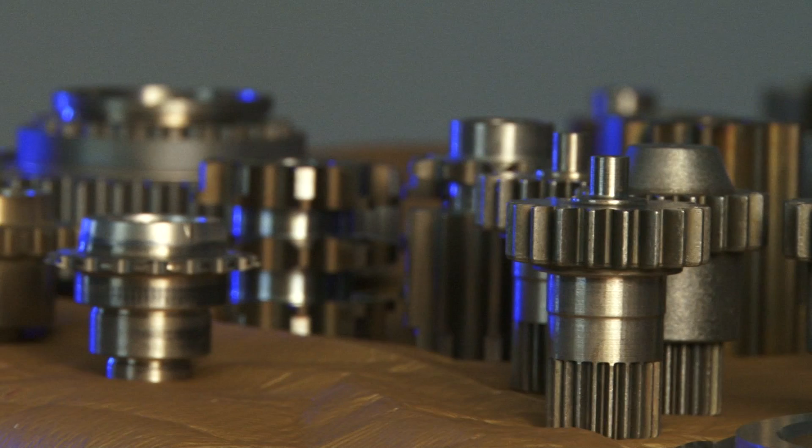Powdered metallurgy has long been the process of choice for the manufacture of net-shaped metal components. PM is extremely effective in creating net-shaped configuration and details that align with the direction of the press. For a long time, powdered metal components, although superior in so many ways, were limited by the difficulties associated with creating net-shaped elements in directions other than that of the press.

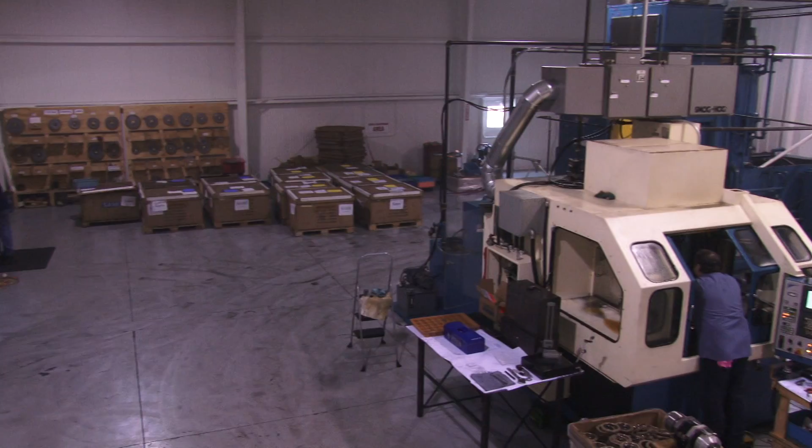Because of the geometric complexity that comes from the net shaping process, methods such as single-point machining and grinding proved unreliable, inefficient, and would often destroy the net shape cost advantage of PM. That is, until now. SAMI, Super Abrasive Machining Innovations, brings the stock removal capabilities of grinding with the cost productivity of machining and a reliability profile that is unparalleled in this global industry.

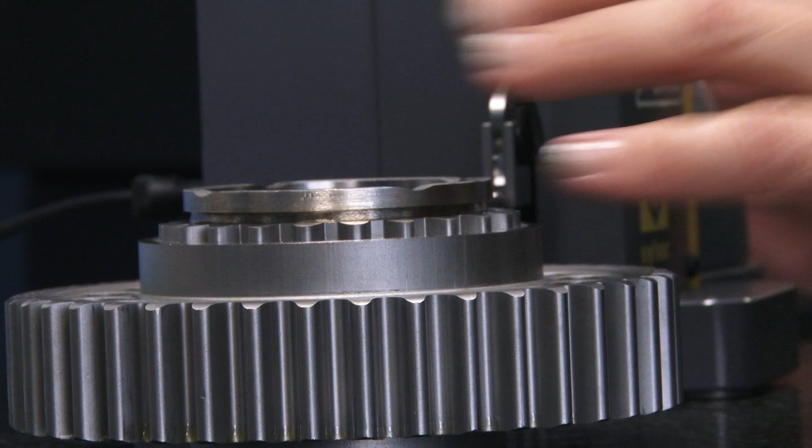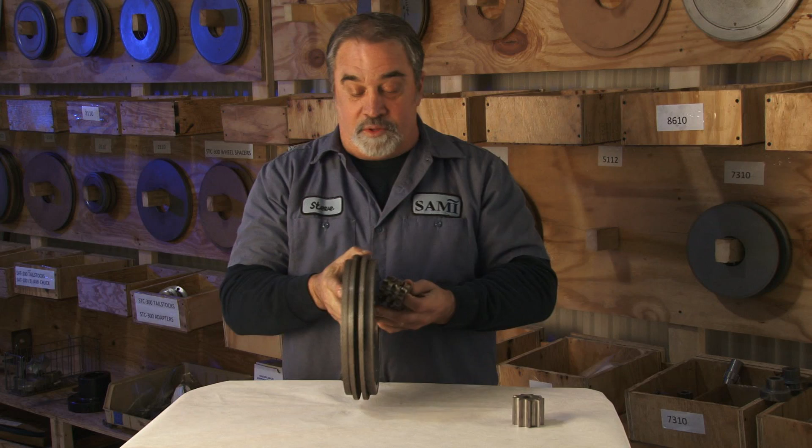In short, super abrasive machining combines the speed and precision of machining with the stock removal capabilities of grinding. This breakthrough was made possible by the development of high-tolerance grinding wheels electroplated with cubic boron nitride, known as CBN, and the use of advanced coolants that allow fast, accurate, heavy stock removal on an extremely cost-effective basis.

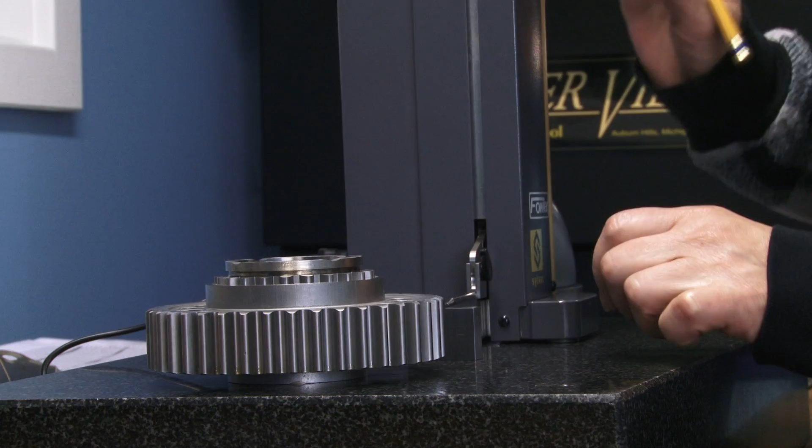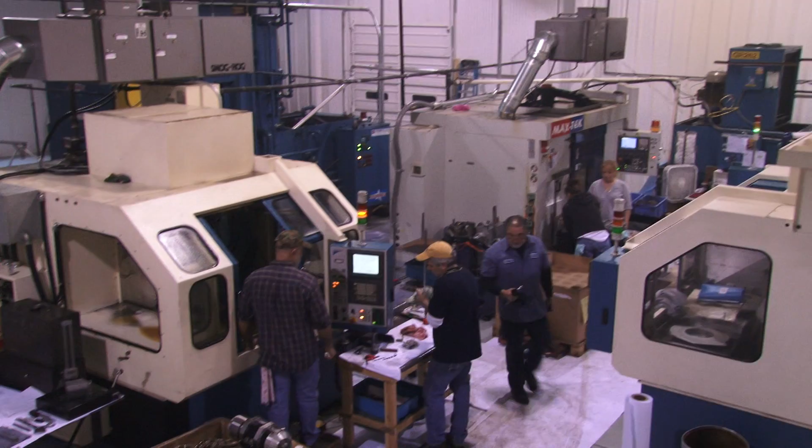Before any order is fulfilled, SAMI performs sample test runs for the Quality Control Department, where highly accurate gauging and measurement equipment and techniques confirm the inherent accuracy and repeatability of the super abrasive process for each and every part. SAMI is an ISO 9001-2008 registered company with a rapidly growing customer base. We're driven by practices and processes accepted worldwide in supplying our product and application services.

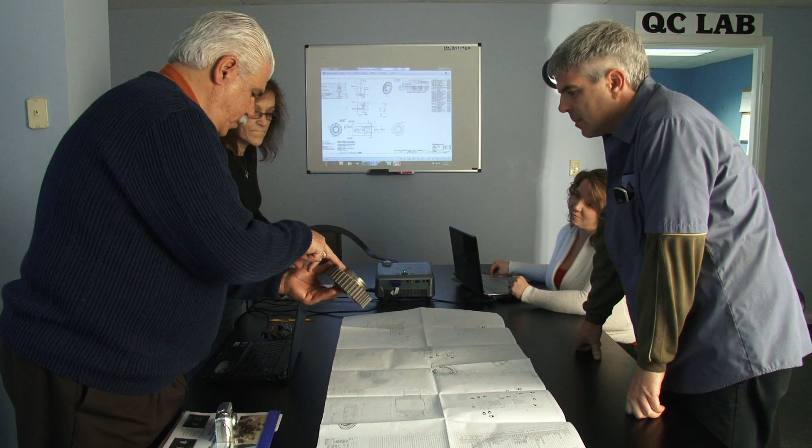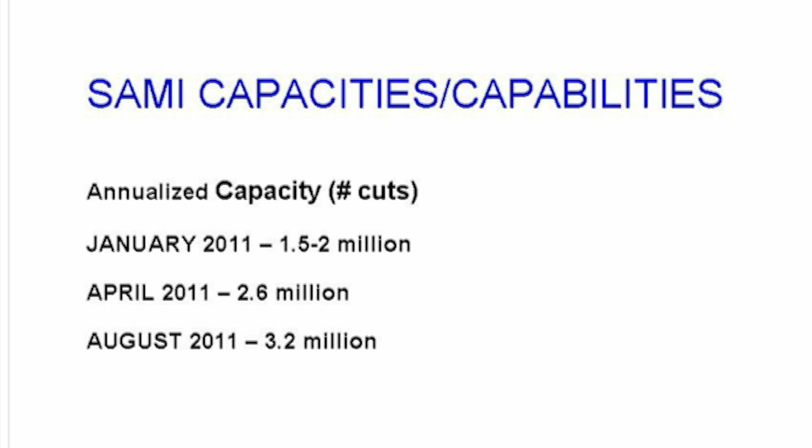SAMI's ownership and management team possesses vast automotive and industrial component manufacturing and supply experience, and posts a significant and substantial track record of starting and running successful businesses. In 2011, SAMI is rapidly maturing as the global expert in application engineering and super abrasive machining process development for automotive and industrial components. SAMI is currently operating 3 machines with an annual capacity of approximately 1.5 to 2 million components, with plans to increase capacity to 3.2 million by the end of 2011, a reflection of the rapidly growing acceptance of the benefits of super abrasive machining technology.

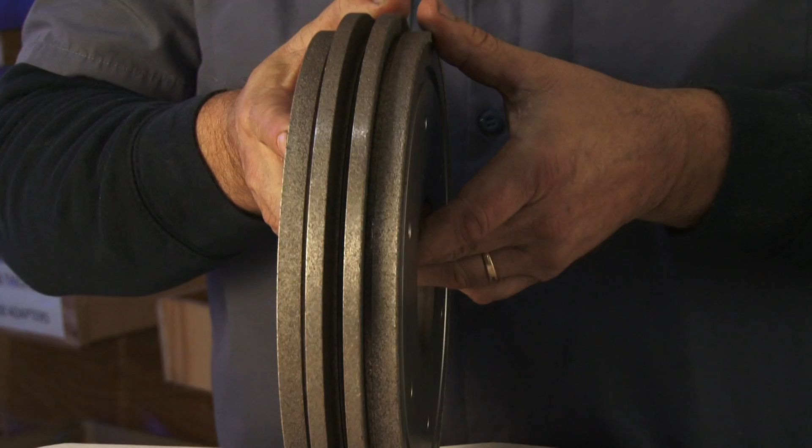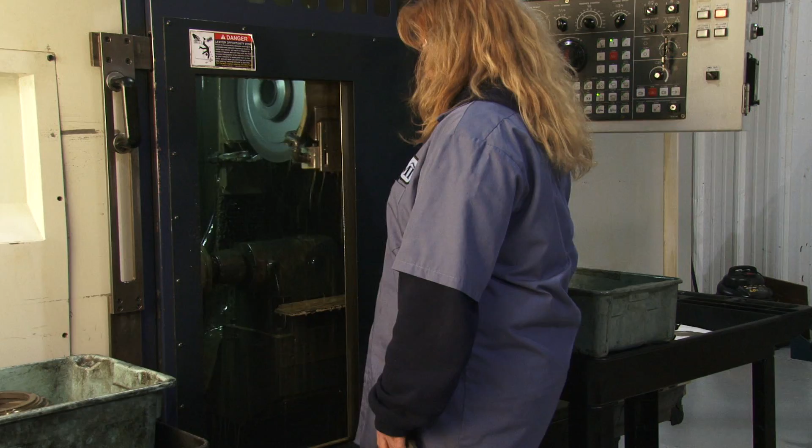The pioneering application of super abrasive machining is best illustrated by its ability to do interrupted cutting of both sintered and hardened materials. By combining the work and power created by the revolution of a 25-kilogram profile wheel at 15 to 30,000 surface feet per minute on a highly stable machine platform and effective high-pressure multi-nozzle coolant application, SAMI turns these once cost-prohibitive cuts into highly repeatable and reliable processes never experienced in the world of interrupted cutting.

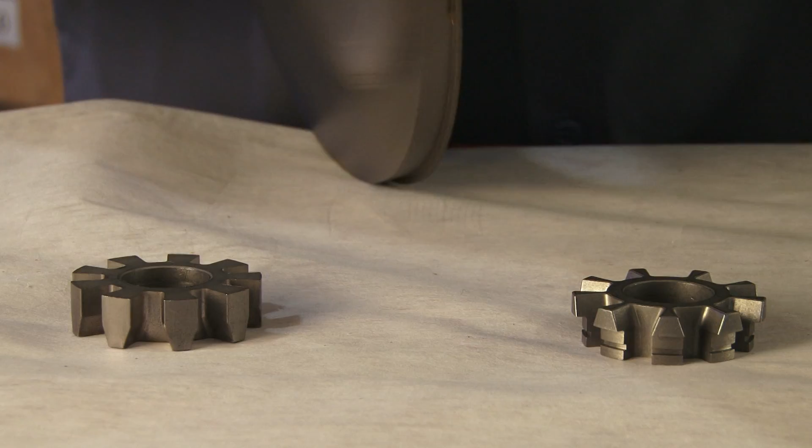The ability to dress the super abrasive machining wheels to specific profile feature shapes allows for the creation of multiple cut geometries by using a setup of ganged wheels in a multi-axis CNC machine. In this example, the interrupted clutch diameter is created to a close tolerance with the first wheel, and the snap ring groove is then machined with the thinner finishing wheel.

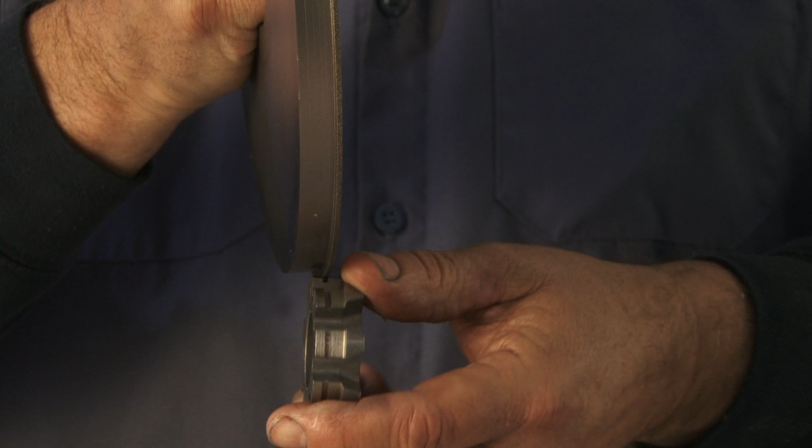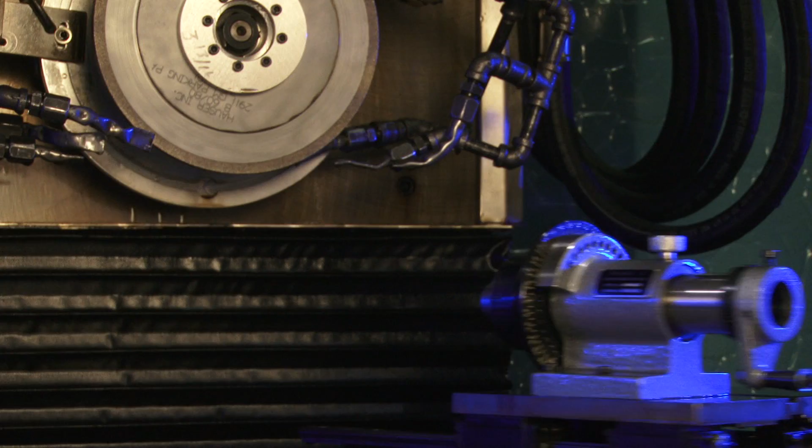The major advantage of the profile wheel approach to machining is that a complete and detailed profile can be created with a single plunge for complex components like this V-belt pulley. This single plunge approach, coupled with zero-wear CBN wheels that stay in spec for tens of thousands of cuts, makes super abrasive machining an extremely cost-effective, highly repeatable, low variability technique that makes powdered metal a viable processing technique.

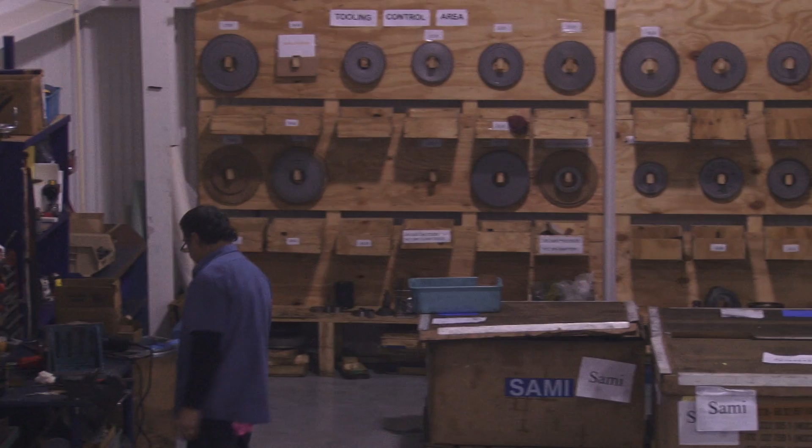As you can see, many varieties of features and shapes are possible with the profile wheel approach. Given the zero wheel wear outputs of the CBN super abrasive process, their ability to create complex features with minimal dimensional variation is a vast improvement over traditional grinding techniques that require grinding wheels to be dressed and redressed constantly.

Super abrasive machining is best described as grinding at machining rates. The use of abrasive wheels means that technically speaking, it's grinding. But practically speaking, it's a machining process given the speed at which material can be removed. Therefore, it is not grinding or machining, but rather grinding at machining rates.

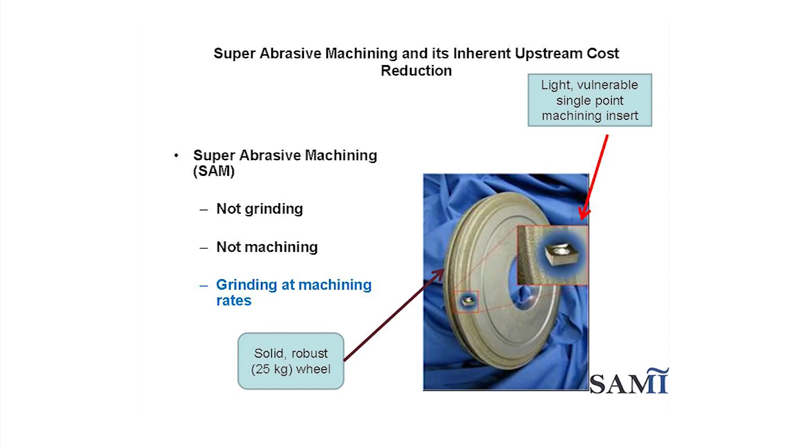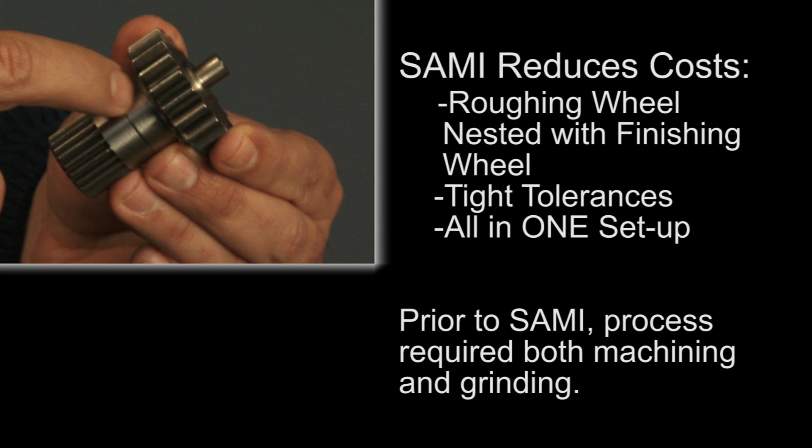Here's another great example of SAMI's ability to reduce manufacturing costs. To produce this component, superabrasive machining removes heat-treated material with a roughing wheel, then completes the cut to tight tolerance with a finishing wheel, all in the same setup. Until the introduction of superabrasive machining, such a processing sequence required machining prior to heat treat to remove the material required to create a robust compaction design, before using grinding of the two journal diameters for tolerance and surface finish control.

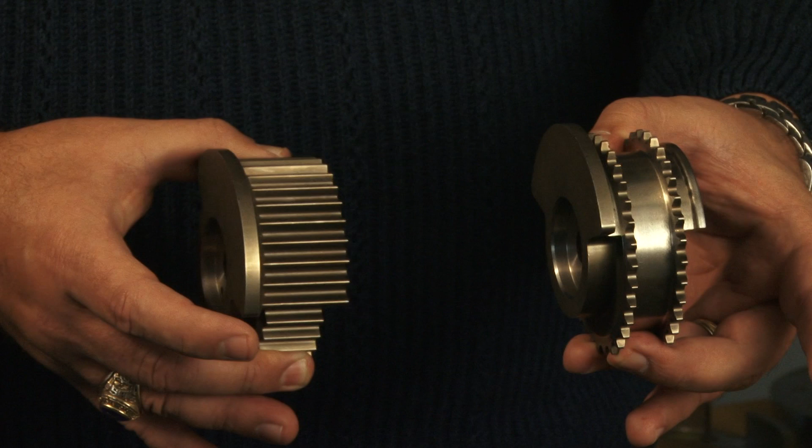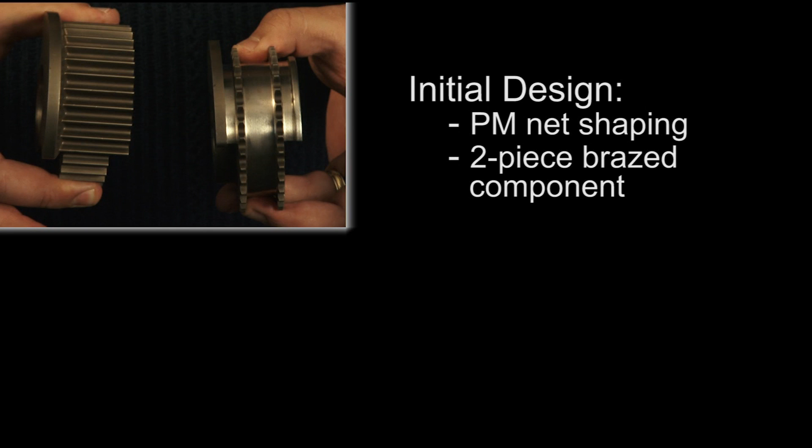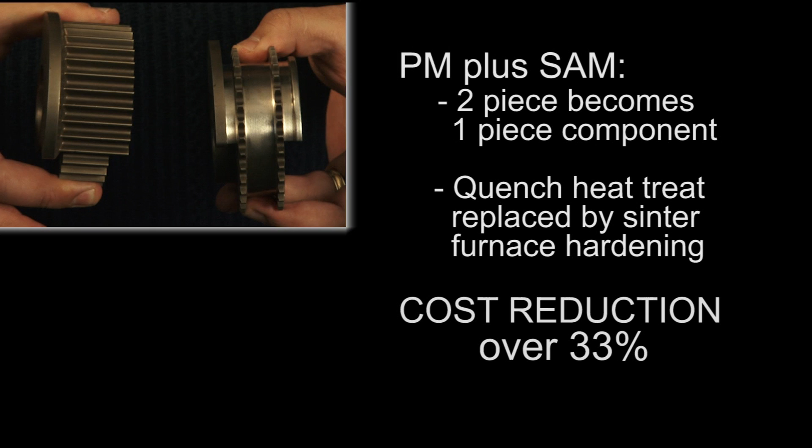This sprocket represents the power of superabrasive machining when combined with PM net shaping capability. The initial design philosophy for this component was to use the PM net shaping capability to add a magnetic timing inducer to this sprocket in a two-piece braze design. By using PM with superabrasive machining, the two-piece design was transformed to a one-piece design. In addition, the one-piece construction allowed the conversion from a quench heat treat process to sinter furnace hardening. The combination of these changes and improvements drove a cost reduction of over 33% compared to the earlier process.

This component represents a typical early application of superabrasive machining. With the advent of increasingly complex automotive engine timing drives, the geometry of the chain sprockets became much more complicated.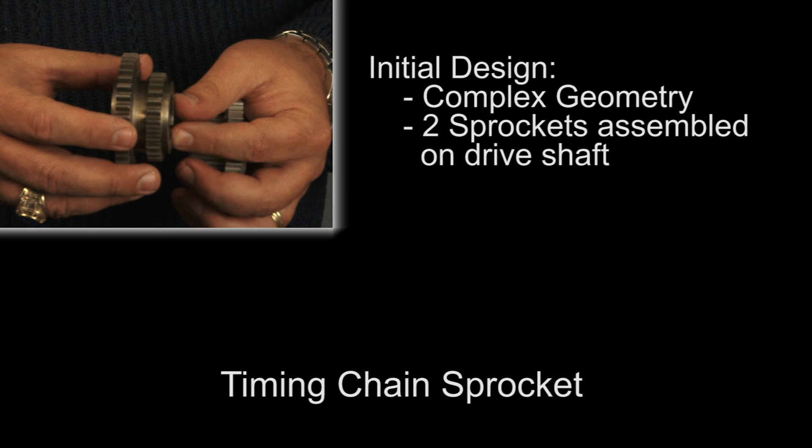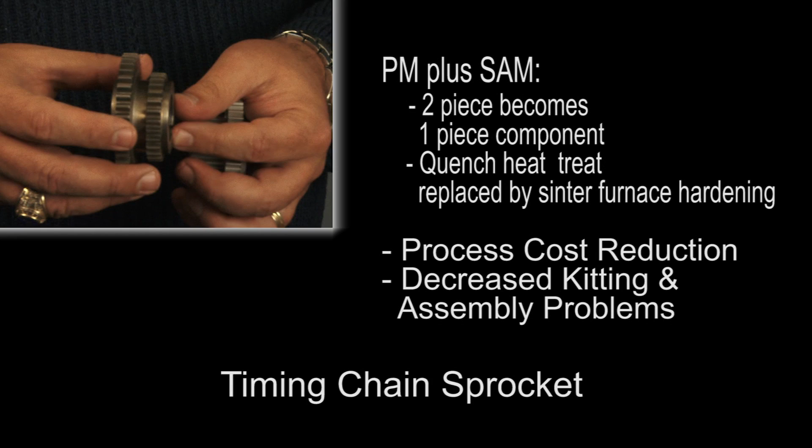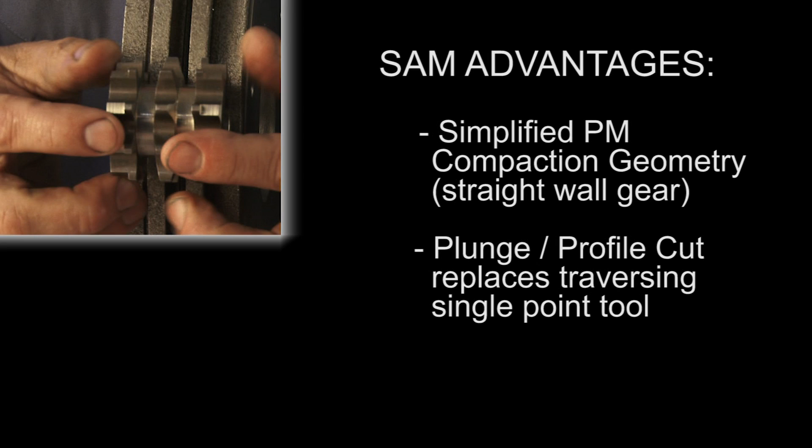Instead of manufacturing two sprockets that were then assembled on the drive shaft, the introduction of superabrasive machining reduced component manufacturing costs that were lowered even further by the introduction of sinter furnace hardening and a substantial decrease in kitting and assembly problems. When properly applied, superabrasive machining allows PM compaction geometry to be greatly simplified and production costs to be significantly reduced. Here's a good example.

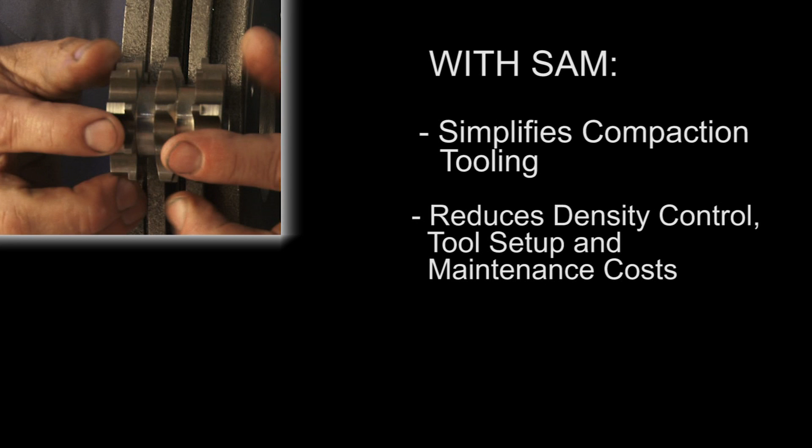In the past, the grooves between the first and second sets of sprocket teeth would have been created with a single point machining of the interrupted cut. Now, that groove can be formed quickly and easily by a superabrasive machining wheel, which allows the compaction die to be simplified and density control, setup, and maintenance costs to be reduced.

These are just a few examples of the ways that superabrasive machining can improve quality and reduce costs. There are many other upstream PM process savings shown here. As you can see, superabrasive machining simplifies both tooling and compacting, which leads to lower scrap rates and fewer finishing steps.

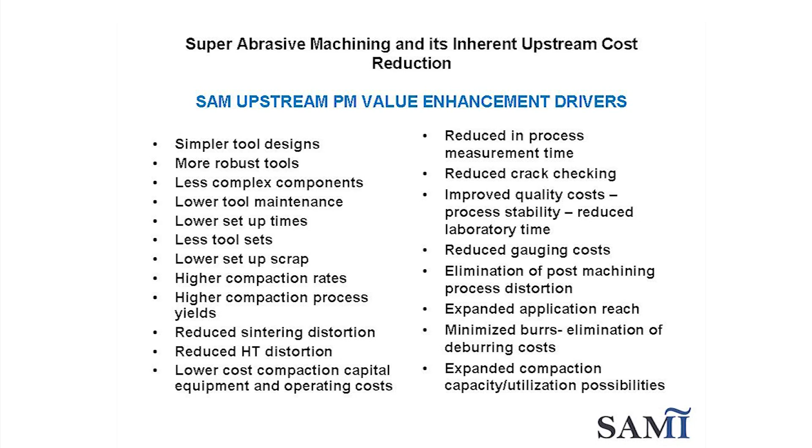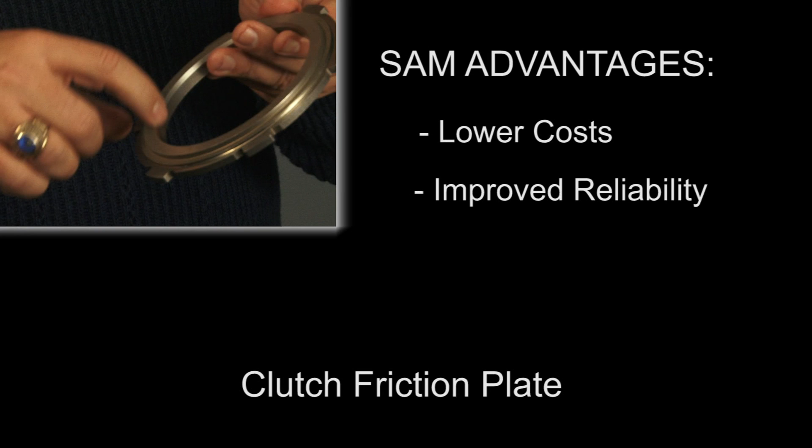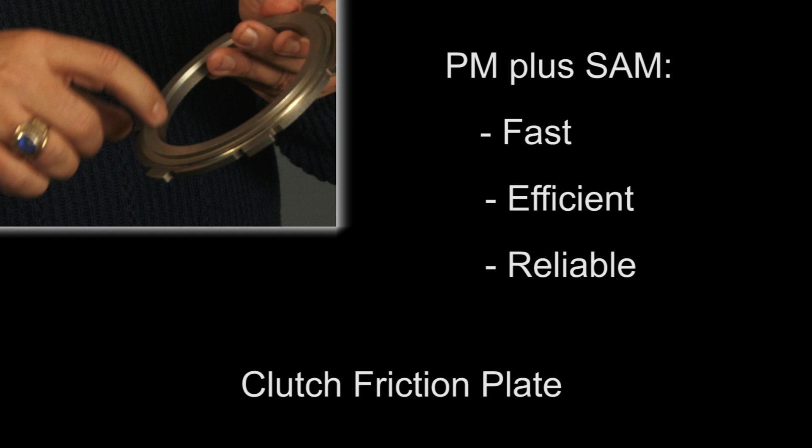This sinter furnace hardened clutch friction plate is another application where superabrasive machining lowers costs and improves reliability. The hardened backing plate is machined, then flipped to create the datum for the critical plunge cut that forms the shoulder. These interrupted cuts are normally costly and time-consuming to create. The superabrasive process accomplishes the task quickly, efficiently, and with great reliability.

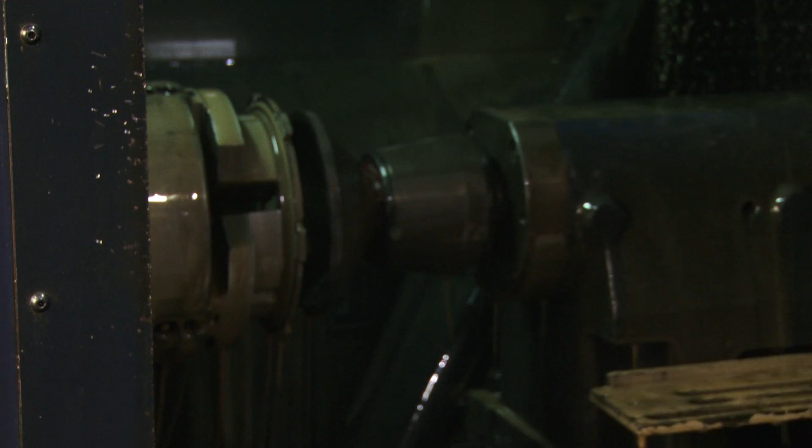The accurate, low-cost machining of the features and surfaces of this friction plate are made possible by every facet of the superabrasive process: a programmable 5-axis CNC machine, CBN wheels and their high-pressure coolant, adjustable wheel speeds, and a variety of grit compositions used for stock removal and finishing. The results are fast stock removal and very high dimensional accuracy.

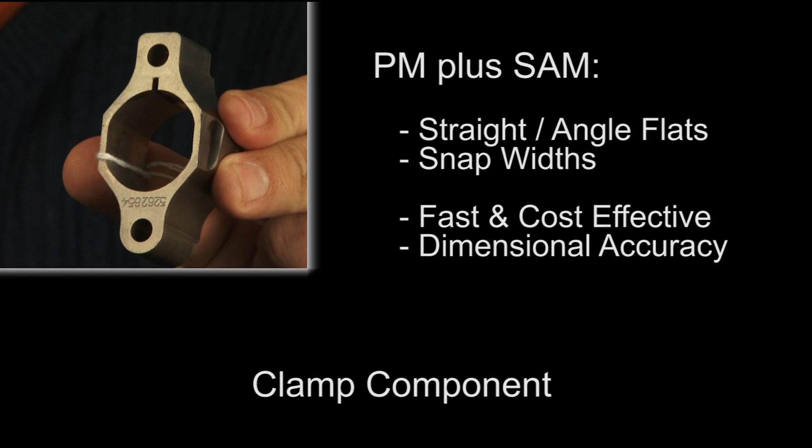In the case of components like clamps that contain straight and angle flats or snap width that are difficult to form in the PM compaction process, superabrasive machining provides a cost-effective secondary method to create those features. Again, the ability to provide these post-heat treat machining processes greatly increases the dimensional accuracy and the relationship of the features.

The full application of PM has traditionally been limited by the lack of a viable process that can create dimensions like flatted slots perpendicular to the direction of pressing. As you can see in this dry superabrasive cycle simulation, multi-axis CNC superabrasive machining now provides that process.

SAMI's talented engineering and operations staff possess the majority of superabrasive knowledge in the industry. Our team works efficiently and diligently to transfer this knowledge to real-time operations and the successful applications that benefit our ever-growing customer base. SAMI draws from its tremendous knowledge and experience in product manufacturing to create new product launches and devote significant time and resources to their success.

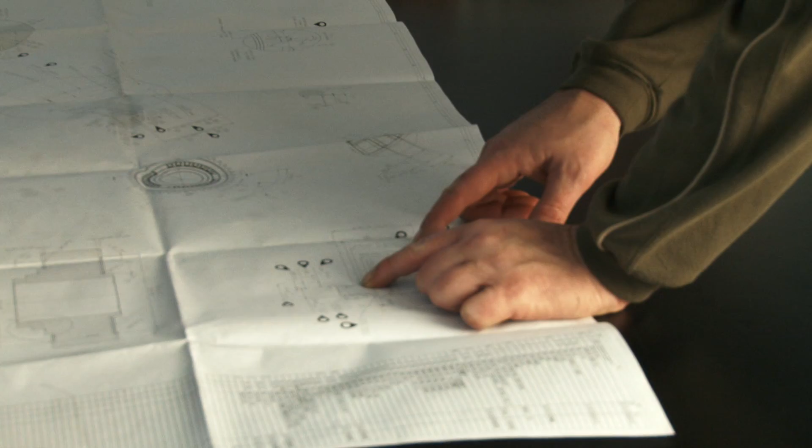Fully embracing Louis Pasteur's philosophy that chance favors the prepared mind, SAMI believes in the old adage that one makes its own breaks and applies extensive time to its quotation, sales, and operations planning and new product launch process to assure a full state of readiness when a customer needs us to produce a part. Sound customer participation from an engineering, quality control, and production planning standpoint are key to this success.

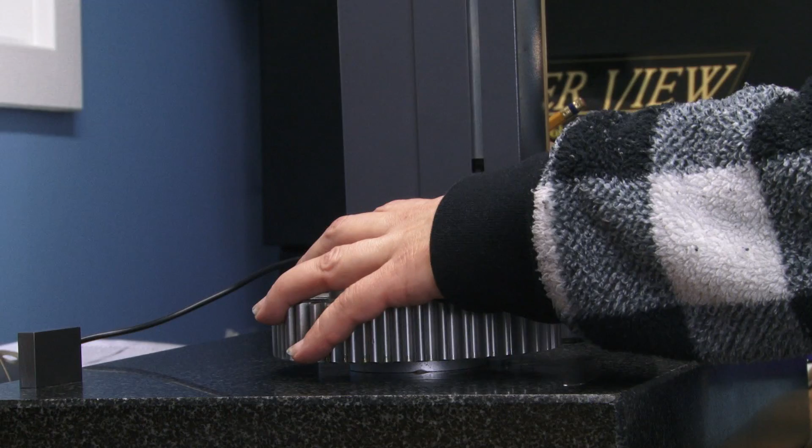SAMI combines this strong preparation discipline with a solid commitment to recruitment, training, and quality. Driven by its fundamental core value that our competitive advantage is the knowledge of our people, SAMI combines an extremely effective and highly trained workforce with precise measurement techniques for each and every part. This solid commitment to training, quality, and people, coupled with the copious advantages of the superabrasive process, allows SAMI to deliver an extremely reliable and accurate supply of parts to its customers.

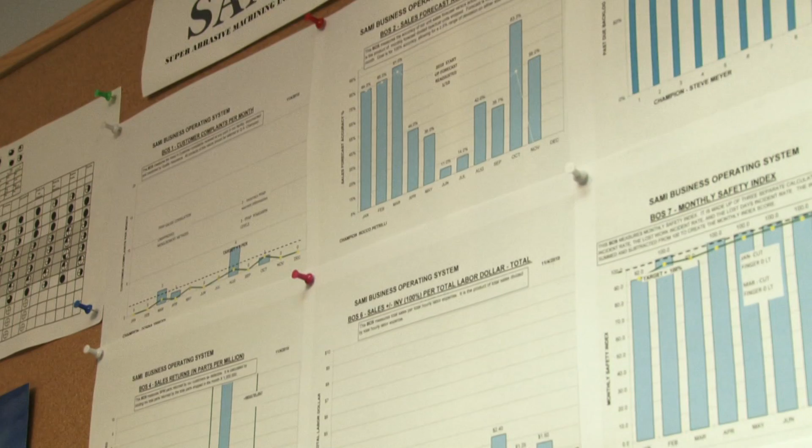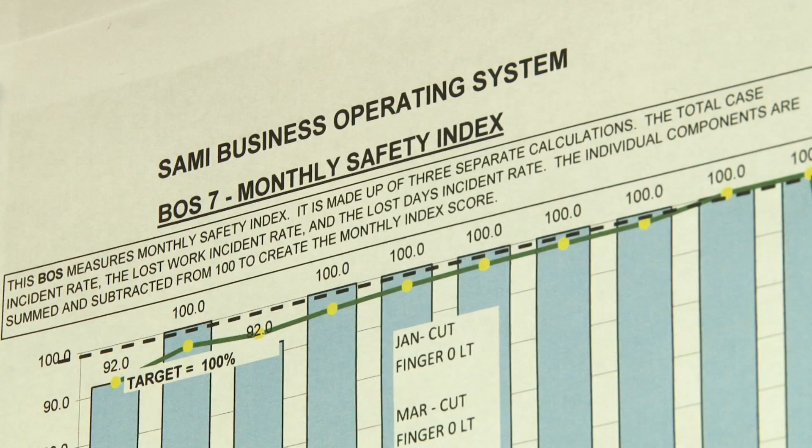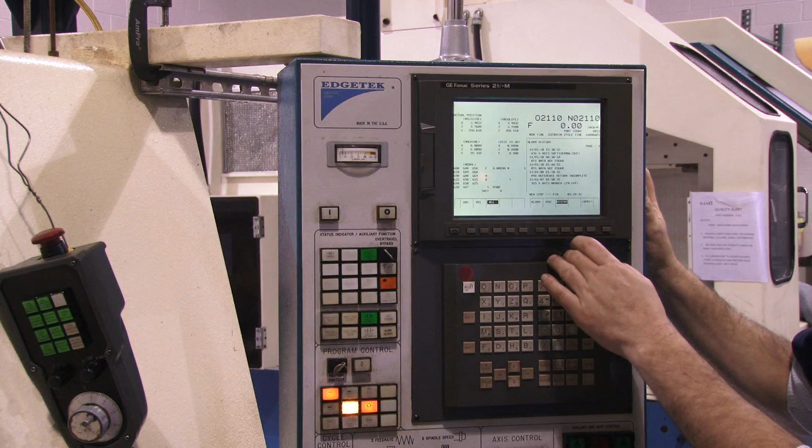SAMI combines this execution-based mentality with its business operating system. This system is made up of 12 of the important variables that drive a successful business. Instead of measuring profit, SAMI engages all its employees in measuring the process variables that drive accuracy, on-time delivery, and profitability, and it depends on them to keep these processes on track. SAMI has built a solid foundation with its combination of unique and effective knowledge, capable people, financial strength, and a growing customer base from which to create its very bright future.

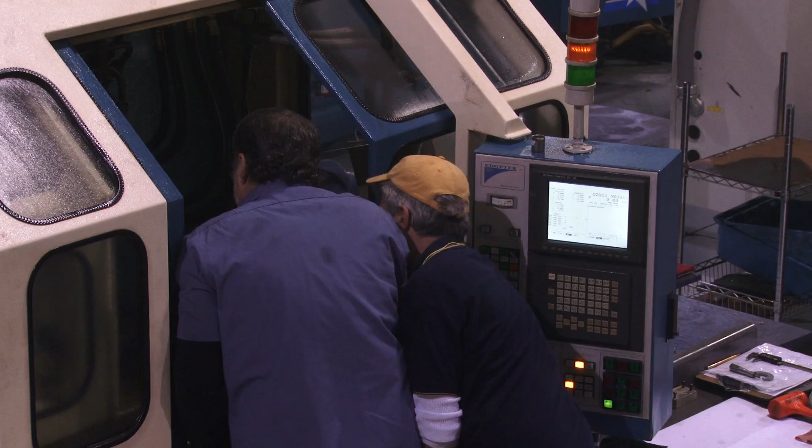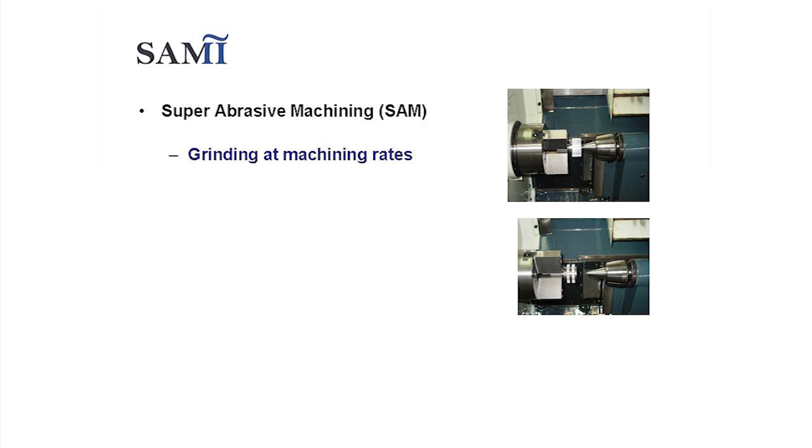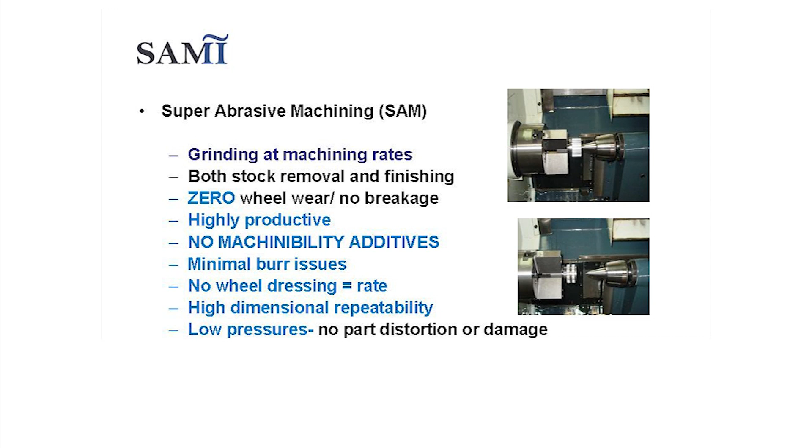In establishing this early industry presence, SAMI has provided a secondary PM forming process that extends the application base of the net shape machining market that is unparalleled. With such skill, knowledge, and capabilities in place, SAMI and its partners will continue to expand the application's envelope through the constant improvement of machine capabilities, reductions in process costs, new engineering applications, technical services, education, and aggressive business development.

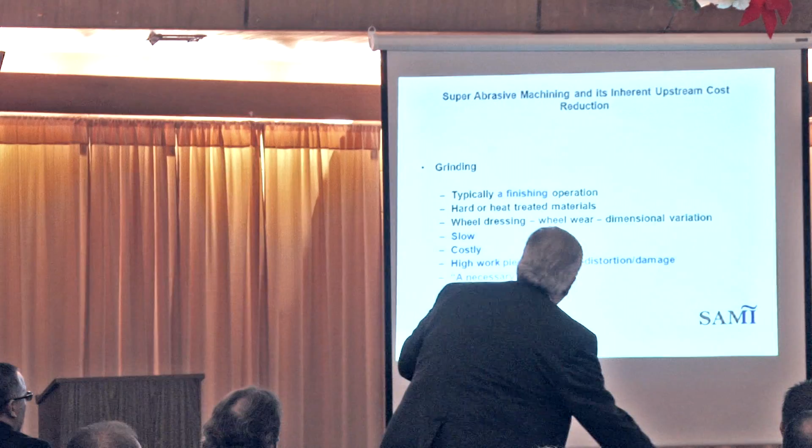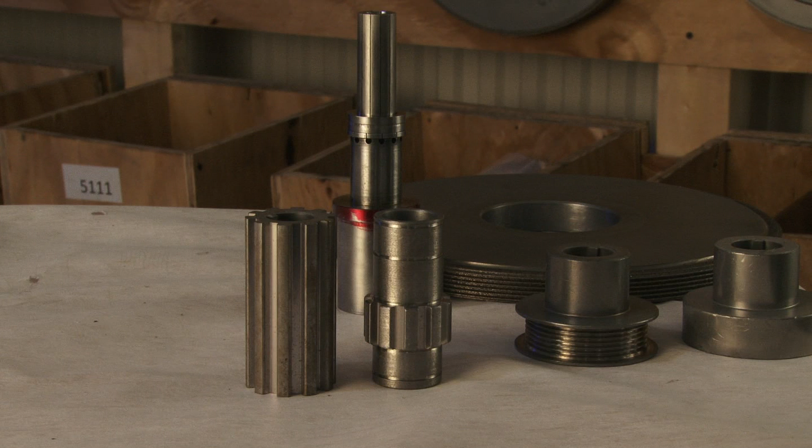SAMI and its broad-based application of superabrasive machining provides the industry with a process that opens new horizons for the design of powdered metal and other net shape forming processes. Using superabrasive machining technology, the inherent cost advantages of net shape forming are no longer canceled out by the high cost of traditional machining and finishing processes. Given SAMI's impact on the powdered metal and other industries, we fully expect the demand for superabrasive machining to grow and grow. With SAMI as your partner, your ability to develop virtually unlimited applications is now possible.